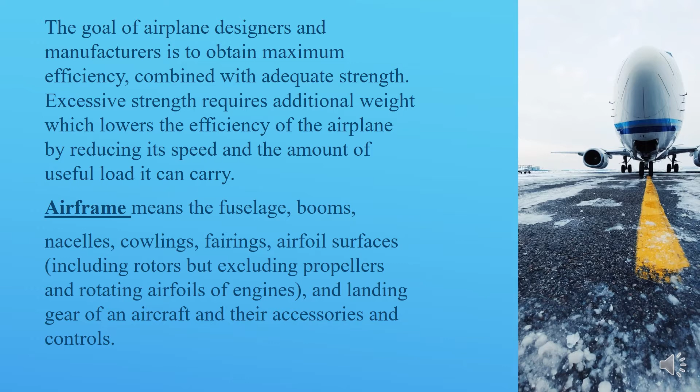Airframe means the fuselage, booms, nacelles, cowlings, fairings, airfoil surfaces, including rotors but excluding propellers and rotating airfoils of engines, and landing gear of an aircraft, and their accessories and controls.

Airplane structure: the required structural strength is based on the intended use of the airplane. An airplane which is to be used for normal flying does not need the strength of an airplane which is intended to be used for acrobatic flight or other special purposes, some of which involve severe in-flight stresses.

Numerous wing designs were developed in an effort to determine the best type for a specific purpose. Basically, all wings are similar to those used by the Wright brothers and other pioneers. Modifications have been made, however, to increase lifting capacity, reduce friction, increase structural strength, and generally improve flight characteristics.

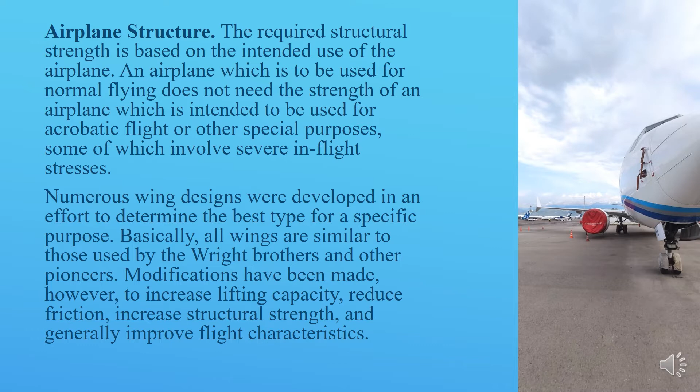Airplane strength is measured basically by the total load which the wings are capable of carrying without permanent damage to the wing structure. The load imposed upon the wings depends upon the type of flight in which the airplane is engaged. The wing must support not only the weight of the airplane, but the additional loads caused during certain flight maneuvers, such as turns and pull-outs from dives.

Turbulent air also creates additional loads, and these loads increase as the severity of the turbulence increases.

The type of wing design for a particular airplane depends almost entirely on the purpose for which that airplane is to be used. If speed is the prime consideration, a tapered wing is more desirable than a rectangular wing, but a tapered wing with no twist has undesirable stall characteristics. Assuming equal wing area, the tapered wing produces less drag than the rectangular wing because there is less area at the tip of the tapered wing.

The elliptical wing is more efficient, with greater lift for the amount of drag, but does not have as good stall characteristics as the rectangular wing.

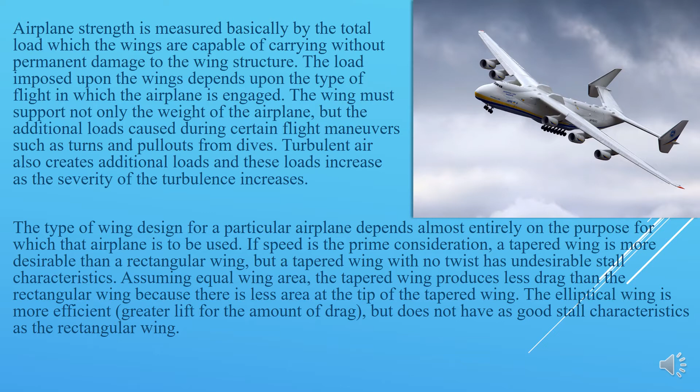Wing flaps are a movable part of the wing, normally hinged to the inboard trailing edge of each wing. Flaps are extended or retracted by the pilot. Extending the flaps increases the wing camber, sometimes the wing area, and the angle of attack of the wing. This increases wing lift and also increases induced drag.

The increased lift enables the pilot to make steeper approaches to a landing without an increase in airspeed. Their use at recommended settings also provides increased lift under certain takeoff conditions. When the flaps are no longer needed, they can be retracted.

Pilots are cautioned to operate the flaps within the airspeed limitations set for the particular airplane being flown. If the speed limitations are exceeded, the increased drag forces created by extending the flaps could result in structural damage to the airplane. The practical effect of the flap is to permit a steeper angle of descent without an increase in airspeed. Extended flaps also permit a slower speed to be used on an approach and landing, thus reducing the distance of the landing roll.

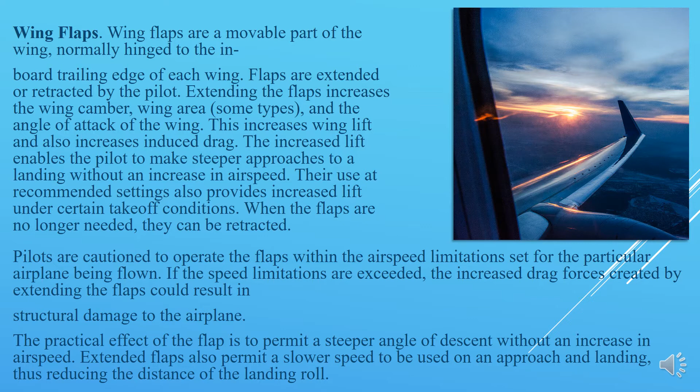Slats: there are two types of slats. The first is a movable portion of the leading edge of an airfoil, especially the wing, which in cruising flight is recessed against the main surface and forms part of the profile. At high angle of attack, it either lifts away under its own aerodynamic load or is driven hydraulically to move forward and down, leaving intervening slots.

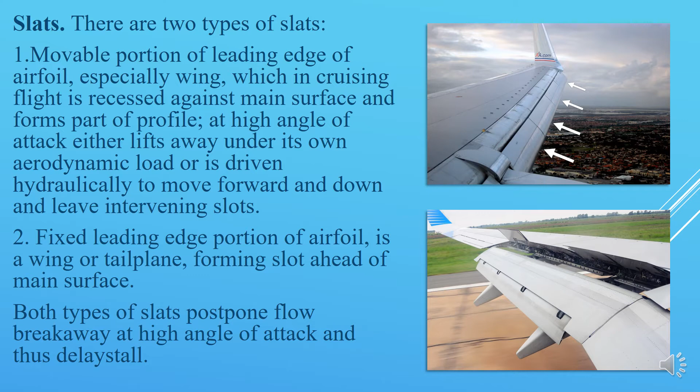The second type is a fixed leading edge portion of an airfoil, wing, or tail plane, forming a slot ahead of the main surface. Both types of slats postpone flow breakaway at high angle of attack and thus delay stall.

Ailerons: lateral control is obtained through the use of ailerons, and on some airplanes the aileron trim tabs. The ailerons are movable surfaces hinged to the outer trailing edge of the wing and attached to the cockpit control column by mechanical linkage. When an aileron is lowered, it increases the curvature of a portion of the wing and thereby increases the angle of attack.

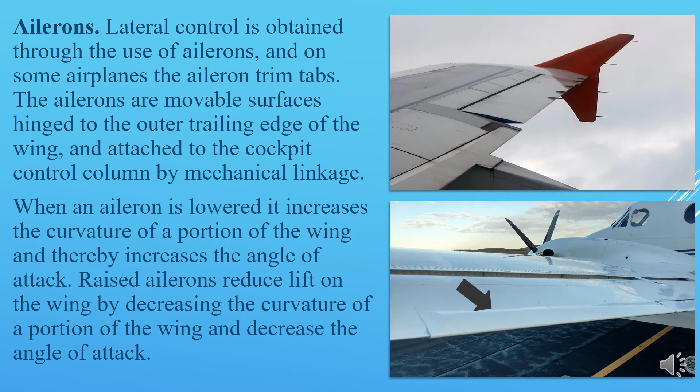Raised ailerons reduce lift on the wing by decreasing the curvature of a portion of the wing and decreasing the angle of attack.

Elevator. The controls used to give the pilot longitudinal control around the lateral axis are the elevators and the elevator trim tabs. On most airplanes, the elevators are movable control surfaces hinged to the horizontal stabilizer and attached to the control column in the cockpit by mechanical linkage. This allows the pilot to change the angle of attack of the entire horizontal stabilizer.

The elevator trim tab is a small auxiliary control surface hinged at the trailing edge of the elevators. The elevator trim tab acts on the elevators, which in turn act upon the entire airplane. This trim tab is part of the elevator but may be moved upward or downward independently of the elevator itself.

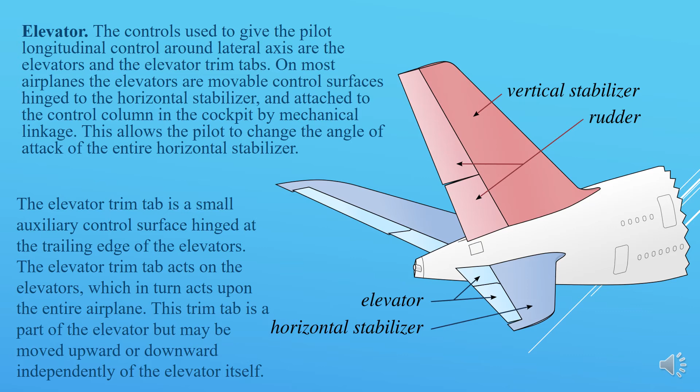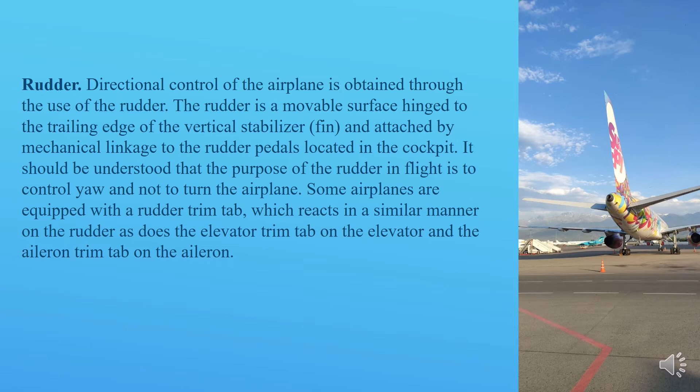Rudder. Directional control of the airplane is obtained through the use of the rudder. The rudder is a movable surface hinged to the trailing edge of the vertical stabilizer, or fin, and attached by mechanical linkage to the rudder pedals located in the cockpit. It should be understood that the purpose of the rudder in flight is to control yaw and not to turn the airplane. Some airplanes are equipped with a rudder trim tab, which reacts in a similar manner on the rudder as does the elevator trim tab on the elevator and the aileron trim tab on the aileron.

Stabilizer. Directional stability is accomplished by placing a vertical stabilizer or fin to the rear of the center of gravity on the upper portion of the tail section.

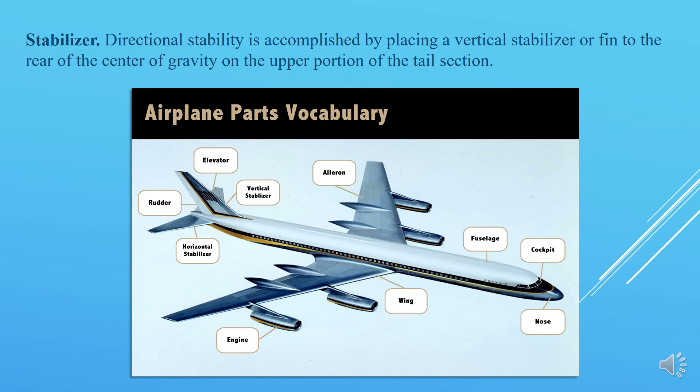Landing gear. The landing gear system supports the airplane during the takeoff run, landing, taxiing, and when parked. These ground operations require that the landing gear be capable of steering, braking, and absorbing shock. A steerable nose gear or tail wheel permits the airplane to be controlled by the pilot throughout all operations while on the ground. Individual brakes installed on each main wheel permit the pilot to use either brake individually as an aid to steering, or by applying both brakes simultaneously the pilot can decelerate or stop the airplane.

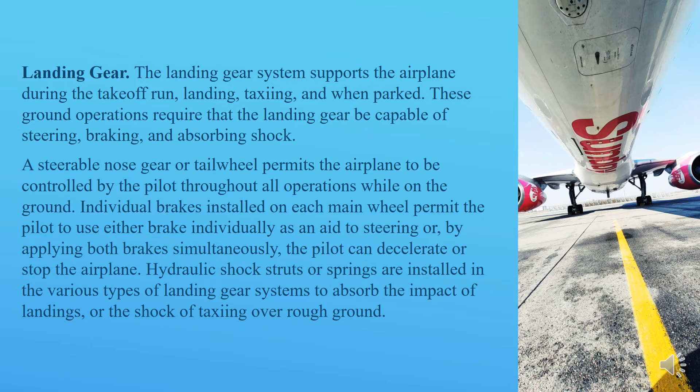Hydraulic shock struts or springs are installed in the various types of landing gear systems to absorb the impact of landings or the shock of taxiing over rough ground.

There are two basic types of landing gear used on light airplanes: the conventional landing gear and the tricycle landing gear. The conventional landing gear, which was used on most airplanes manufactured years ago, is still used on some airplanes designed for operations on rough fields. This landing gear system consists of two main wheels and a tail wheel. Shock absorption is usually provided on the main landing gear by inflated tires and shock absorbers, while it is provided on the tail wheel by a spring assembly to which the tail wheel is bolted. The tail wheel is usually steerable by the rudder pedals.

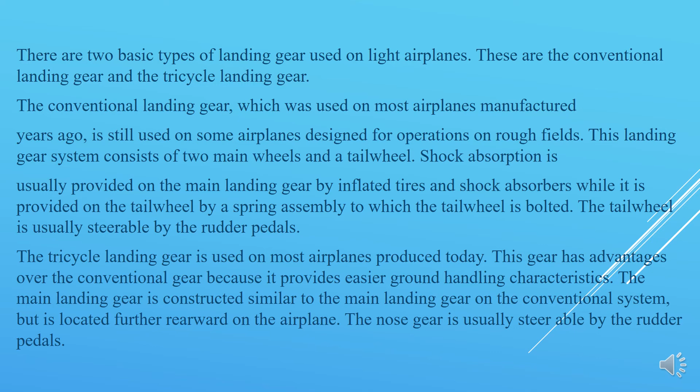The tricycle landing gear is used on most airplanes produced today. This gear has advantages over the conventional gear because it provides easier ground handling characteristics. The main landing gear is constructed similar to the main landing gear on the conventional system, but is located further rearward on the airplane. The nose gear is usually steerable by the rudder pedals, permitting sharper turns during taxiing. Shock absorption is provided on the nose gear by a shock strut.

Some light airplanes are equipped with retractable landing gear. Retracting the gear reduces drag and increases airspeed without additional power. The landing gear normally retracts into the wing or fuselage through an opening which is covered by doors after the gear is retracted, providing for the unrestricted flow of air across the opening which houses the gear.

The retraction or extension of the landing gear is accomplished either electrically or hydraulically by landing gear controls from within the cockpit. Warning indicators are usually provided in the cockpit to indicate whether the wheels are extended and locked, or retracted. In nearly all retractable landing gear installations, a system is provided for emergency gear extension in the event the landing gear mechanism fails to lower the gear.